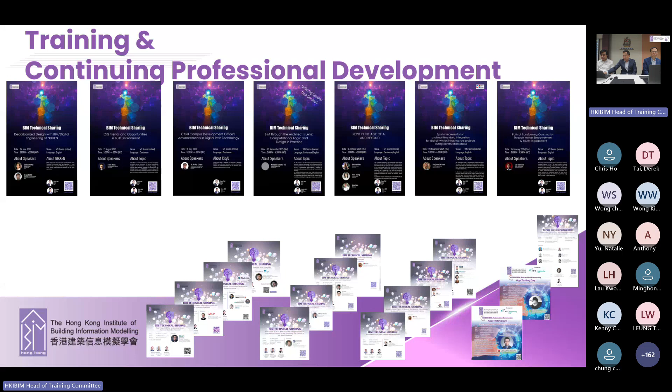Young membership division. This division recruits secondary school students. Some, like Kowloon Sam Yuk Secondary School, have already set up a BIM and GIS laboratory. So we are helping the young members, recruiting them and training the students in BIM and GIS. These are all the CPD events; for this term we already completed 7.

Past events: we completed the BIM Automation Arena 2025 in the first quarter of last year. We also arranged 3 site visits to the Centre of Future Construction of CIC, Trunk Road T2, and 2 other CEDD projects. HKIBIM and KIBIM: we have signed an MOU with the Korean Institute of BIM. Hopefully we'll be establishing other activities with these overseas BIM institutes.

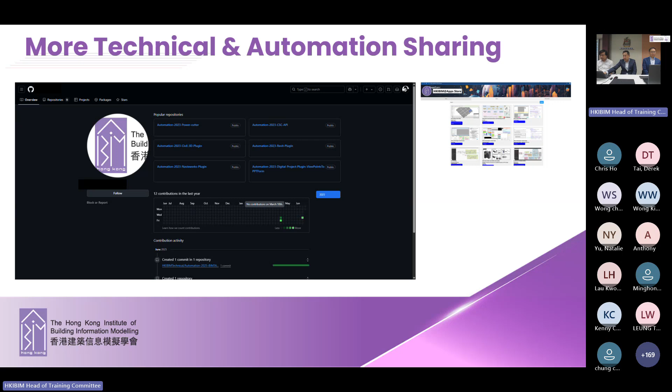We'll be rolling out a GitHub to share some of these automations. Hopefully it will be out sometime within this year.

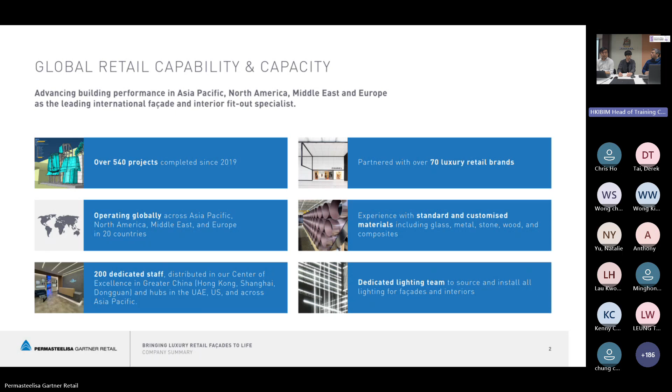This is the context of what we do and how we use 3D in our design and build life cycle. We're going to walk through normally which kind of project we work on and how we integrate the progress in our projects.

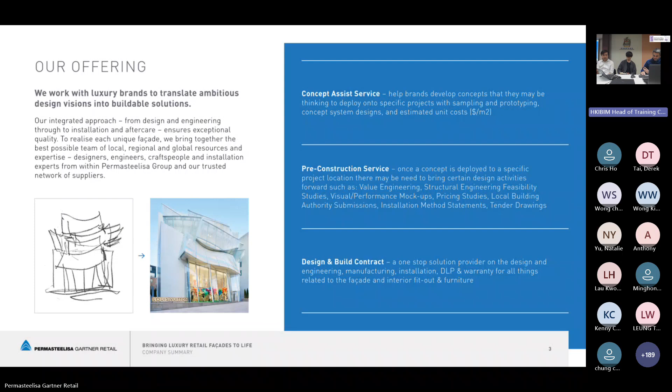Normally when we start a project with one of our clients, we start from a concept or pre-construction services. Before the tender is awarded and before the construction phase starts, we already start engaging them, giving support on material limitation and other constructability issues. So in the life cycle of a project, we can start before even the tender and construction phase starts. This is where a lot of the basic concepts in 3D are already being implemented, to get maximum productivity from our 3D.

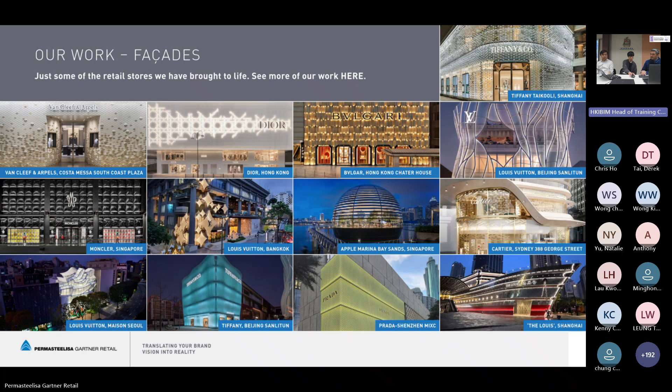We are all around the world, but today we're going to show you one particular project that we finished in China. Because our clients are luxury brands and normally like their privacy respected, I'll simply show you a couple of images so you have an idea of the project.

This is a project in China, in Beijing. It's a 5-story building, a curtain wall unitized facade that on top of it has a secondary decorative skin. This secondary decorative skin is the main part of the project. Although we took care of both parts of the building, the whole envelope of the facade, mostly we'll talk now about the 3D component we had to go through, from concept creation to completion.

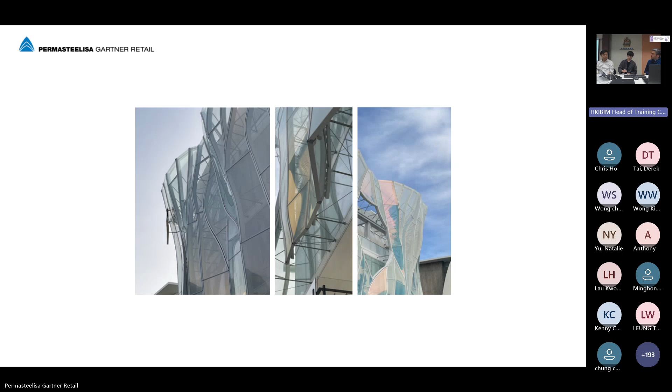I'll pass the rest of the presentation to Steven to walk you through the work done. Yes, hello everyone, this is Steven.

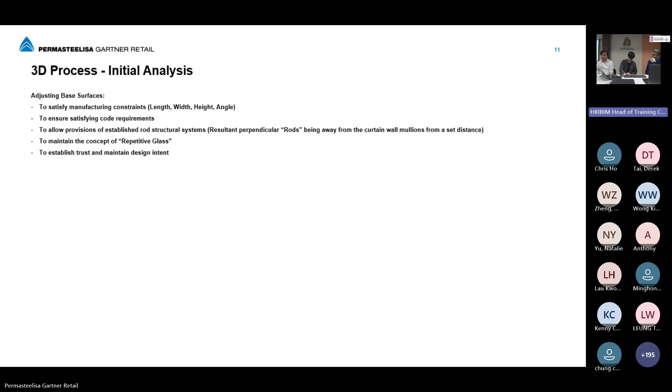I'd like to talk about how we basically walk through the whole 3D process. I think the initial starting point is to receive the architect's model, and then based on real world constraints, site conditions, code requirements, some structural thinking at the initial point, and most importantly, to respect the architect's design intent, to do our rationalization.

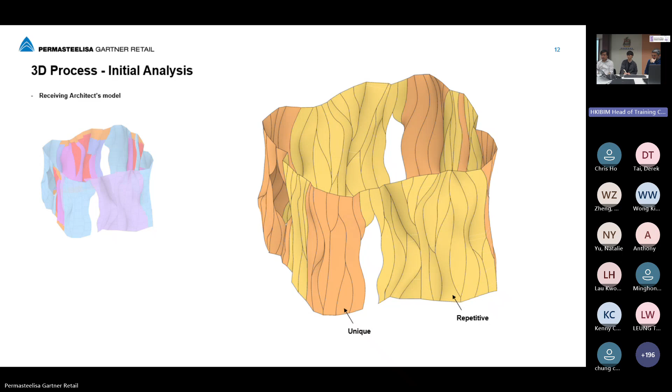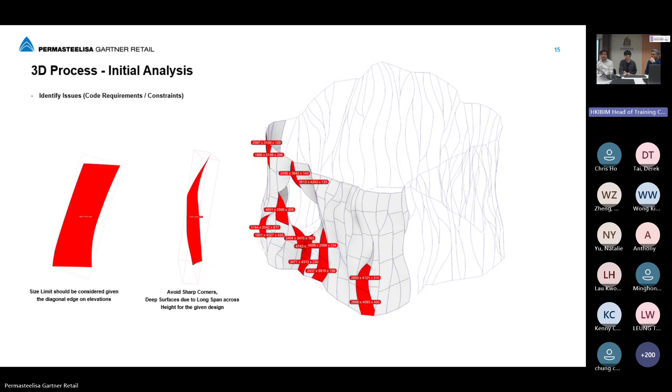Once we get the model, we do some initial analysis - maybe they are out of site boundaries, or sometimes code requires a certain maintenance zone. Initial communication with factories - glass sizes have certain constraints, and sharp corners need to be avoided. So we do this initial analysis and go through where the glasses are oversized.

I think the very important part is to understand the design from our point of view. This is the first step. We need to establish our own way of modeling the design, and at the same time allow adaptation of various requirements that come along the way.

For example, we have this kind of inner skin, so we have constraints when we want to set out our outer facade, because we want most of the structural members supporting the facade to be perpendicular to the facade. So the initial idea is to understand the design, find a way to replicate how to model it, but at the same time take care of the future constraints that will be imposed on the design.

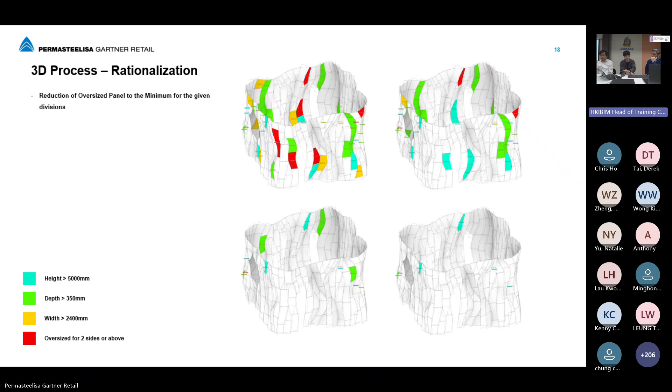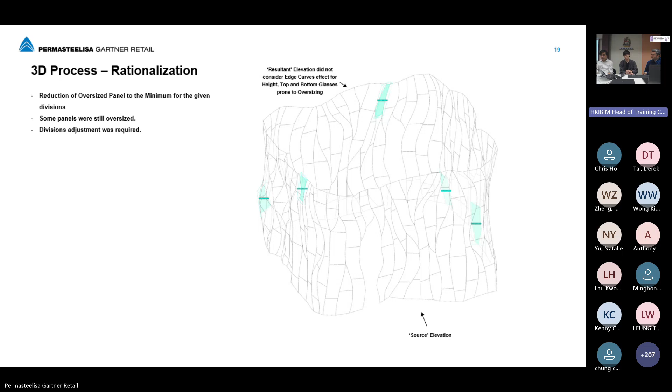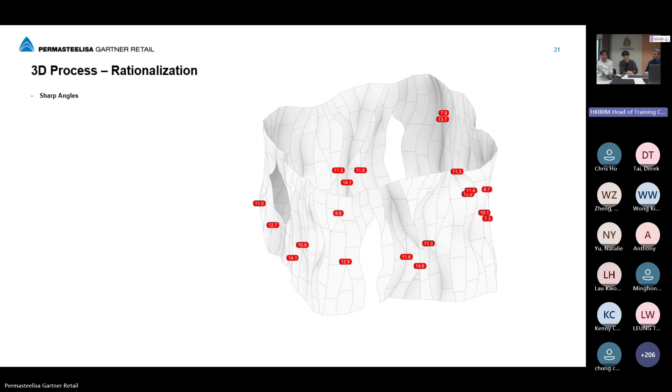With that in mind, we can establish our own way of creating the design, primarily in Rhino Grasshopper. We remodel the design and take a reiterative approach to gradually optimize it so we have minimum oversized glass. When it cannot be optimized anymore, we communicate with the architect whether they can adjust slightly the division of glass so it stays within the boundaries. We also communicate the sharp angle requirements so we can make slight adjustments to the geometry, keeping it minimal while still satisfying the requirement.

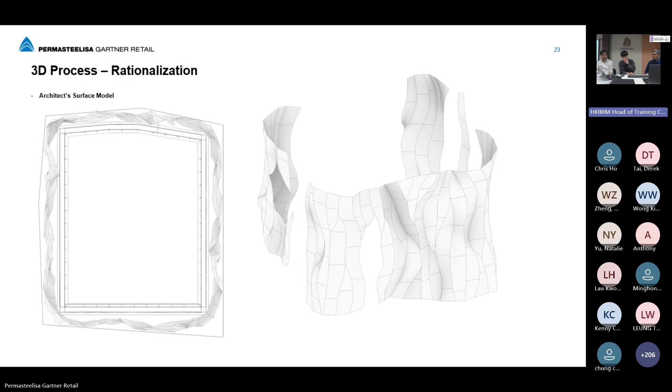This is an initial architect's surface model, and this is the PISA Gartner Retail surface model, before and after.

This is the first stage of our modeling, which goes to the LOD 100, but bearing in mind future fabrication needs. This also respects the repetitive glass idea that the architect would like to have, to save costs. Here we have 315 pieces of glass, 216 of which are unique, and the repetitive glass idea can be kept in the very first generation of the LOD 100 model.

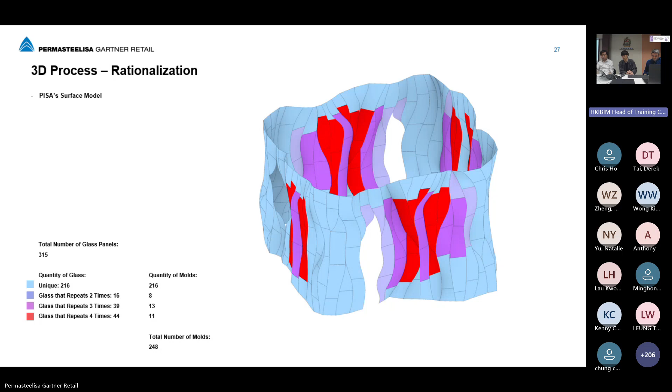Next we want to talk about the wireframe development, which is a core process of every complex project we do here in Gartner Retail. No exception for this project, because it allows us to create an accurate engineering model and, based on this true geometry information, to develop further fabrication models.

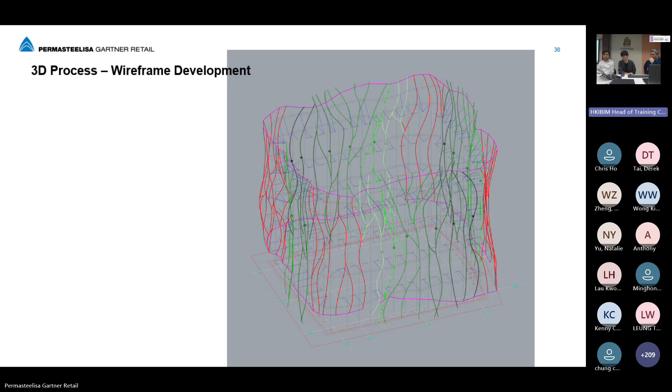So we go through the wireframe again. First we have the true curves in red, the unique curves, and all the repetitive glass representative curves. That's the generation input, which gets rotated 90 degrees, 180 degrees, to ensure repetition across 4 elevations. These curves are not arbitrary—the adjustment also takes care of structural requirements like clearance, and maximizes the perpendicular element to the inner facade.

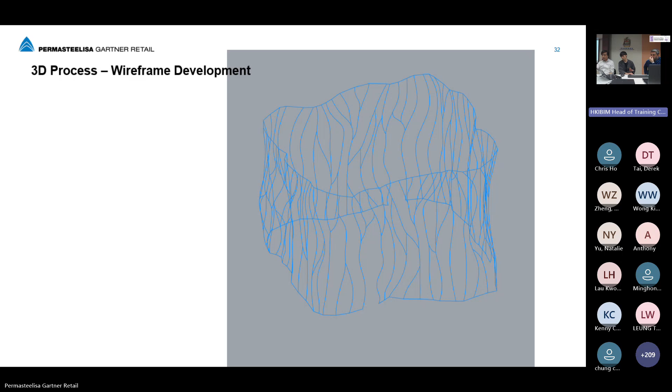Then we get the initial wireframe. From this wireframe we start to get the base geometry of the glass—you can see the closed boundary generates the glass. We take the architect's division of glass, rotate it just like before, and then we get the surfaces.

One key thing is that during the design process, we think ahead about how this can be more economical and more realistic. The pure generation of geometry may not be ideal because sometimes it gets really warpy. So we try to maximize the design intent while straightening all the edges, so that in the final fabrication models all the transoms end up straight.

Let me recap a little—at the very beginning, the client provided a design surface, and that was our starting point. After certain iterations, thinking back to the early stages of the project, we made sure the limitations of the material could comply with the initial intent. The first initial iterations show yes, we can achieve what you want, and with small variations, we can achieve that.

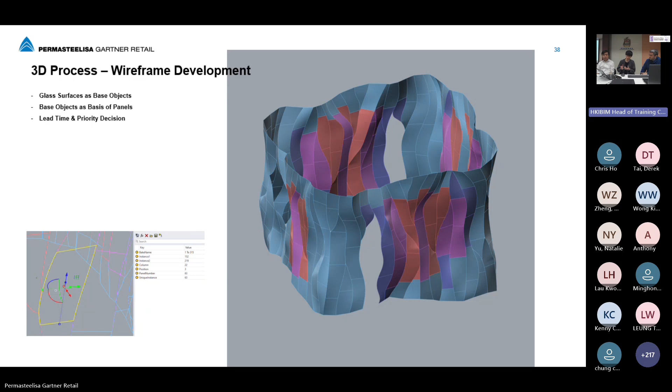And then in Rhino we input some initial data so that we can keep going, where the glass is a parent and all the children will go inside like the brackets that we'll talk about later. It's a very productive process, we think.

Just like what Jose is saying, the extremities of the geometry determine how the 2D looks, and what kind of sealant joint and gaps result. At the end it becomes very informative for how the 2D is drawn for the final submissions.

Okay, so I think we want to talk about some things that cannot be done without 3D, or cannot be done without this kind of parametric modeling.

One of the trickiest parts in this design is locating the brackets in the CHS. Basically, on the left side you can see this is a typical panel, glass, and they have different brackets. But each panel shares one CHS, so they are always competing for the space.

Computational design helps a lot here because firstly we locate all the corner brackets, and then use a methodology like musical chairs. The first panel gets the intermediate bracket space, then the next one grabs the remaining available space, and then the next one, and the next one. They loop through like a musical chair, so at the end all the brackets can be looped through the process without clashing with each other.

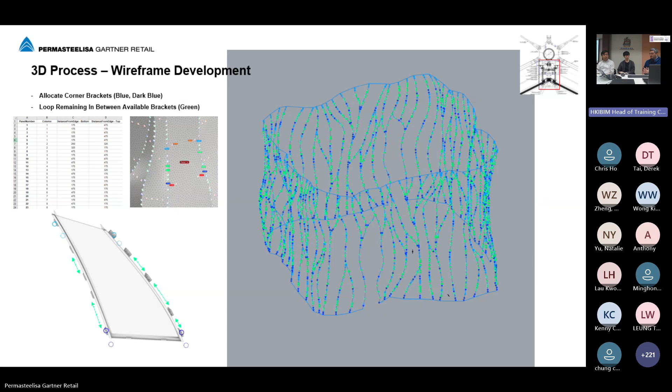Yes, we are looking for efficiency here. And it can repeat, basically—yeah, it can repeat.

So once we talk about brackets in terms of points, we basically locate them in space. The left one—later we'll talk about the engineering of the brackets—but each bracket has some attributes linked to the panel itself, so it's a child of the parent panel.

Then this information translates directly to the engineering model, which we'll talk about directly. On the right-hand side, after the engineering model comes back, we can directly transfer the calculated models and how the engineers assign the bracket types, directly mapped onto the brackets.

And eventually it becomes the real bracket happening in the fabrication model. To visualize, when we say the engineering model and the input from the engineer, any panel is going to have a deadload bracket, a horizontal slot hole, a vertical slot hole, and an oversized slot hole. This kind of information transfer happens even within our own team, between our own engineers and our own system designers.

The tool to do this is an Excel file, which is an extraction from the 3D. So the engineer only says, these are the conditions that you need to meet, and here is the naming of every bracket for every condition. And automatically this information is transferred to the 3D. Yes, so all the things have the naming. For example, the panel number, then the type of the bracket and whether it's left or right. So everything gets connected to the base file.

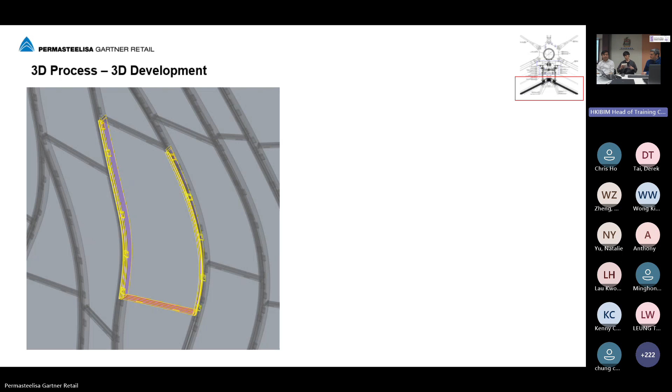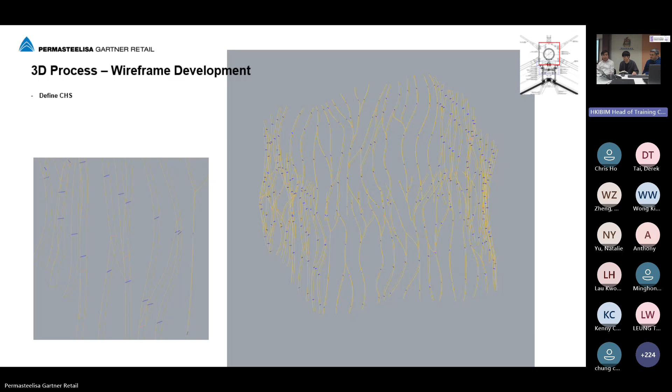So up till here, we are already talking about 100-something files that interlink together, but they can be quickly updated one by one once their previous steps need to be changed. Yes. So these are the kind of panels that we talk about. Okay, so in this sequence we are going from glass, to the frames that support it, and then to the CHS that the bracket is holding on. So, going inwards. We define the CHS straight through the geometry we talked about, using a very rigorous offset relationship, determine all the intersections and create this base surface, and then we get the offset glass surface.

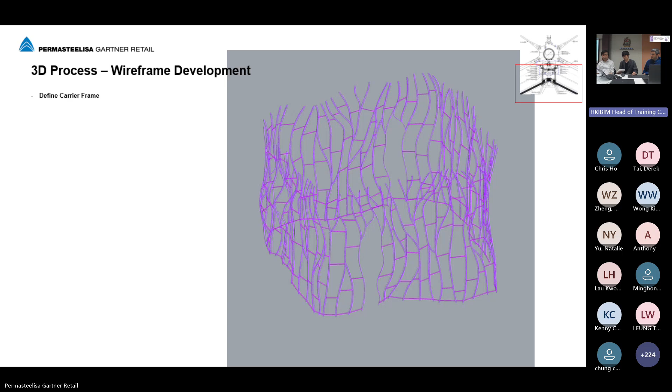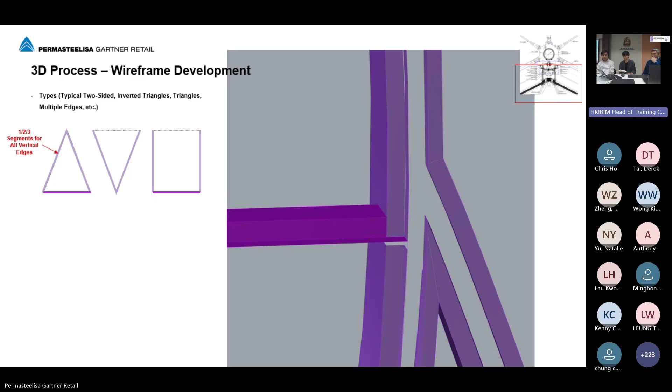So we need to have a rigorous filtering system to understand every kind of geometry and model them separately, and it can be automated in a certain way. And this gets translated directly to the engineering model that we talk about. And here, you can see we are even defining the setting blocks for the carrier frame that the glass sits on. These setting blocks are also related to whether a panel has a transom or not, whether the mullion is segmented or not. And everything gets automated in this way. So eventually we get into the panel engineering model.

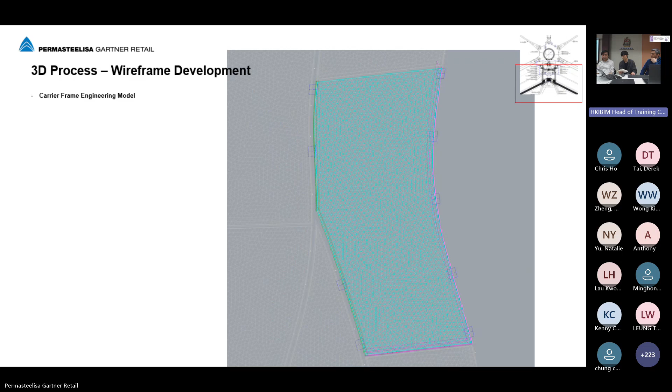This engineering model is basically a very accurate model that represents the true geometry relationship with meshes, lines and points. This is one panel, and these are the adjacent panels. You can see this is a line and point model, but it actually represents the geometry information. For example, there's a bracket in blue, a very thin line. The purple, magenta is a mullion. The glass's various layers are meshes, triangles. Even the setting blocks are represented in lines perfectly connected to the meshes, so that everything gets translated to the engineers for them to calculate.

Of course, this demands very expert engineering. It's an engineering feat, to be honest. The engineer actually has the capability to master parametric design and understand this massive amount of data to make it possible.

So eventually, the glass and the panel calculation was done in Strand7, but we can work together in a Rhino environment as well to have live feedback, and we can go through the kind of reiterative process that we talked about.

Then we start to talk about the CHS, 3 points in CHS. So CHS is a curved structure that our bracket rests on. I think the key thing we need to do is to make it single curved, with a radius for easy manufacturing, which is very common. But there are three things in this project that are special. The first thing is the curvature. This is a very free-form curvature.

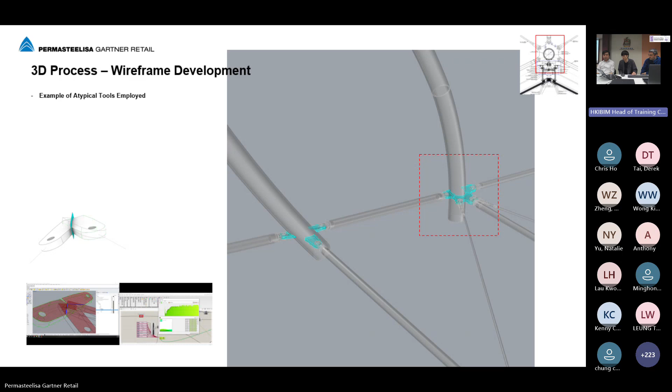So eventually it becomes geometries, having these ears that catch the rods, which the next slide will be talking about. This slide is basically talking about how along the way we have some very atypical situations that are common in many projects. So we need to develop custom tools. In this case, we are finding the best intersection of very random-looking ears, because we need to raise the facade at the bottom level, which cannot be horizontal. Okay.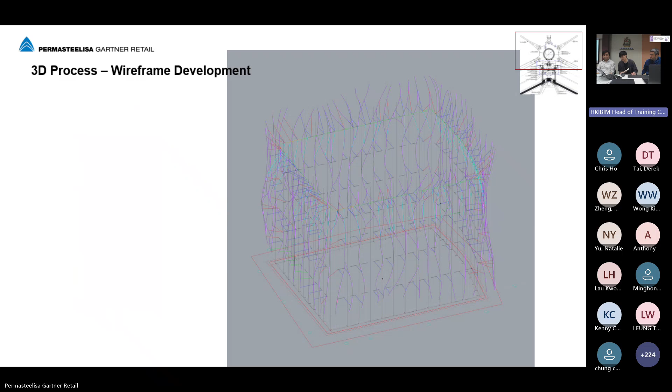Here, you can see the curvature that we are trying to control is as close to 90 degrees as possible to ensure the efficiency of the rods. As we said, in this rod arrangement, we consider the constraints of the inner curtain wall, embed locations, different kinds of constraints, and more structure. This is the dead load, the dead load cables, and then we have bracings and stuff. So within this network structure, how are we going to tie the network of rods back to the main structure at the spandrel that we are seeing here?

I think this comes to really the core of a real communication between system designers, facade designers, and 3D, because at that time we don't exactly know the result, but at the same time the system designers have to foresee what is going to happen. So basically we have different kinds of rods that meet each other. At the end, the system designer came up with a facade solution with 4 main types of adaptive component brackets. You can see on the top left corner these 4 main types.

The first one is the adaptive component that takes care of the horizontal plane of the rods. So the rods that only come back to the main building horizontally use the first type. The second type is horizontal plus the upward rods. Third type, horizontal plane plus the downward. Fourth is everything. So here you can see the system designer has a really smart design that can capture all the directions of rods that go back to the building.

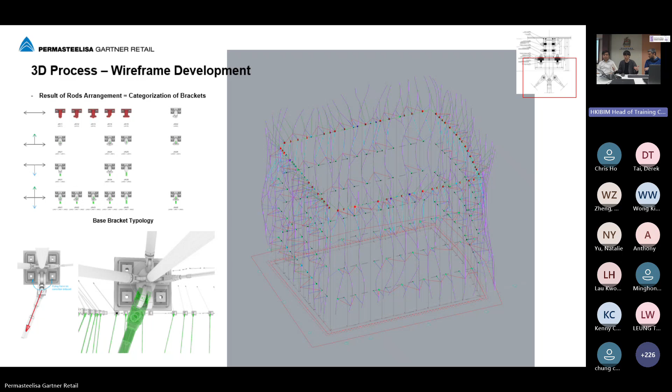And how many rods, how many types of rods, and where they go is basically automatically determined by the 3D model, because the 3D model is already there, and you can analyze how they are coming to that point. So through that, you automatically get how many types you are going to have during the design. So the 3D model counts for you. It does the work for you.

So I think this is basically, you can see on the screenshot, the center points of all the rods to that adaptive bracket we talked about. Also, you can see the little tiny legend on the top right corner.

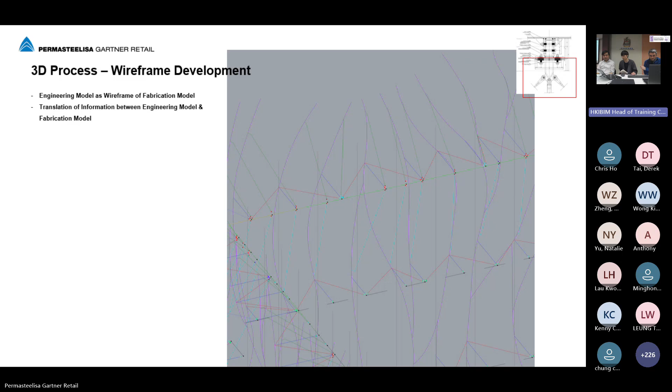I think in this slide, before and after, just to show, again, the wireframe, the center line is exactly representing the fabrication model that we are going to see. And this becomes really effective because in this project we take the fabrication model to the client for final approval. And because it becomes really fast and automatic, I think it was quite smooth during the process.

Let's take a step back from the nitty-gritty details that Steven is explaining. All of this is really heavily visually impactful for what the client wants to see. The client wants to see a piece of glass that looks like a veil floating in there. Now we start doing engineering and showing them rods and tension cables and things like this. And they need to visualize and give us input. We have a VIP room here. This is too crowded, modify it. So we need to change, go to the engineer and come back.

Again, this is tied up with the name of the presentation, design and build life cycle through 3D. Because design is a process by which you keep going deeper on the spiral. You do one iteration: client, engineer, manufacturer, our system designer. You present to the client, who has comments. You do another loop, and you keep tightening, till you run out of time, you run out of money, and everybody has done the best that they can do.

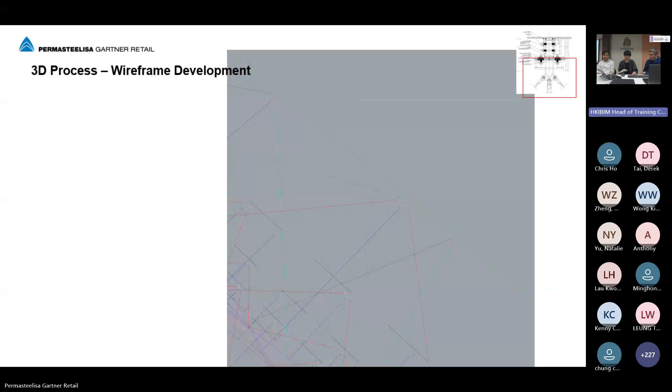Because we are doing a presentation to you which looks linear. We start with the glass, carrier frame, CHS, tension rod. But the reality is that we give a pass to everything. We get a comment and then we come back. Again, it was an iterative process. I would say without this kind of repetitive process or this kind of system, it would take a century to finish, because there is really a lot of automation happening here.

Same slide, center point, fabrication model, same relationship. Okay, we need to go fast. Final two parts for the 3D modeling. I'll talk a little bit about the fabrication.

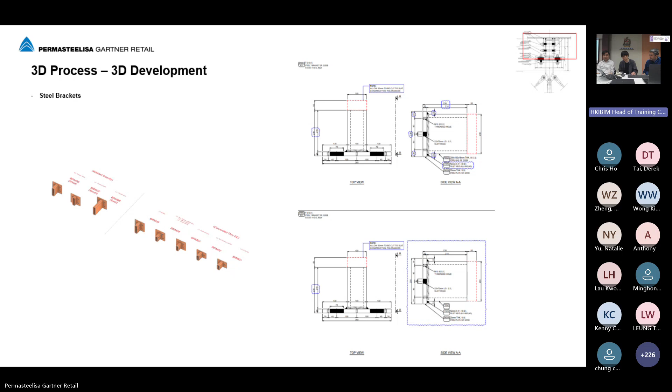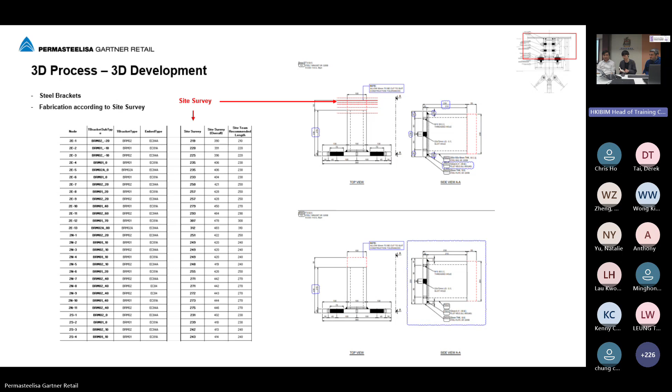So initially, behind this adaptive bracket, we have this steel bracket tied to the main steel structure. Unfortunately, the site survey came back, and it is not the ideal line we all expected. But we can quickly talk to the site team, and we also communicate through data sheets. They quickly came back to us with each point from the site survey, and then we basically recreated the whole steel frame quickly, directly fabricated and sent it to site, and we didn't have any cutting on site for installing this steel fabrication. Otherwise, we would have a lot of remedials on site, costing time and money.

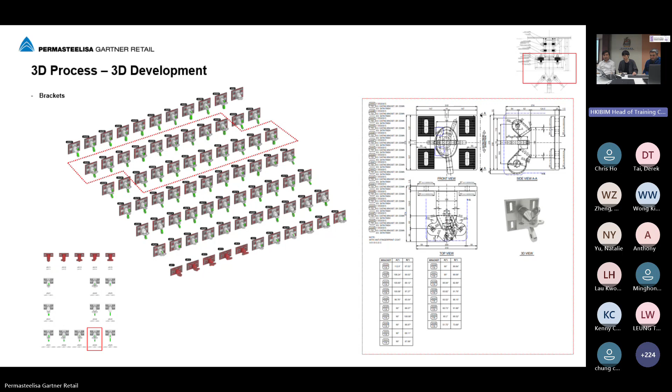Adaptive components in front, same. Basically, depending on how the rods are hitting the points, we automatically generate all types of brackets through computational design. All the rods have their own attributes and naming. This is the diagram showing the actual installation diagram for the site installer. But at the same time, we embed all the information in our models.

Which, by the way, is a tool, the same way that before we were talking about with the engineer and the system designer, how the engineer is explaining to us which are the dead load brackets, which have the slot holes like this, which is the vertical slot. So this is a communication tool to our site teams and our manufacturer. They are getting a really digestible quantity of information.

There were hundreds of rods. There were hundreds of brackets with small variations, but having a really clear color coding system, numbering system, and documents that are really easy to read, the communication with the team becomes easy. And in the end, we are looking for efficiency. Efficiency on site, efficiency in the manufacturing.

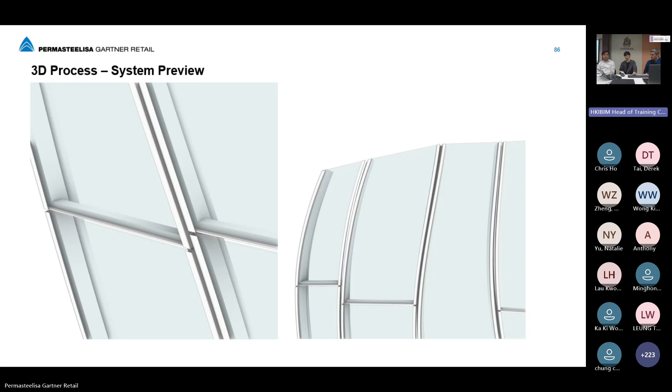Correct, because what we were working on 99% of our time was that wireframe 3D that doesn't tell you anything if you are an architect. It doesn't give you a visualization, which is the final product. But we were able to bake through Rhino and extract this kind of, not an LOD 350 yet, not 400 for manufacturing, but they are in this 200, 250 that is good enough for them to give an approval. Modulation, size of the cappings, size of the glass, proportion. The most important visual elements.

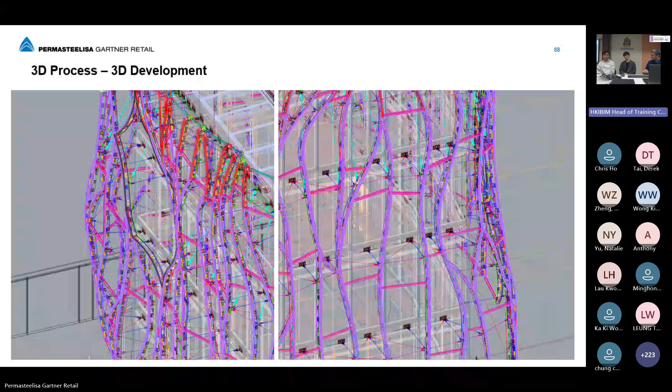Yes. So eventually we come through and we have a full LOD 400 model that is used for everything: fabrication, site installation, client's final approval for everything. Okay, final part for 3D modeling. As we said, all the models are linked with data. We have a lot of attributes in our objects in the 3D space.

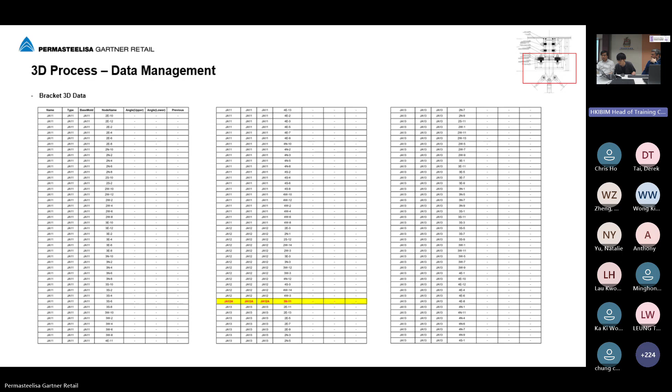For the first steel bracket, we link with the site survey data, for example, and what is the type of the bracket, what it is connected to, where it is. The front adaptive component shows all the node information, where it is, the angles, the position, base type, and the base model it is.

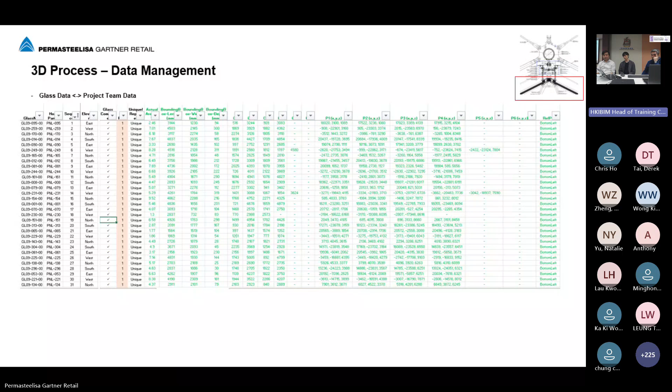And finally, not only within the design team, we are talking through data with project teams, QA, QC. We quickly export all the data for them to measure panels in the factory to make sure things are in tolerance. The project team can make use of this table to input their preferred construction sequence. Coordinators can keep track of which glass has been done, has been shipped, through one single table that we can keep referring to.

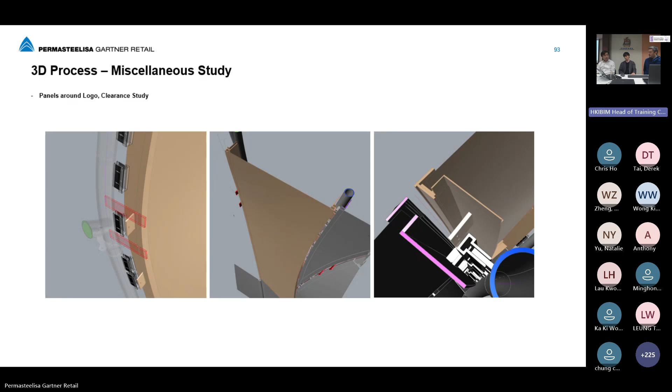Some GIFs to show what looks like an improbable installation, because we have some signages in the CHS, it is already a very tight space. And we have some signages that go through the CHS. We want to know whether the panel can be installed or not, so we have a lot of these animations. This becomes, again, a tool of communication with our site installers where we show them the installation sequence. So this is a part of the installation method.

Yeah, one more GIF. So basically, luxury brands want to expose their design at the very last minute to have the wow effect. At that time, we need to install the canvas on top of our outer skin facade, which is already very optimized, so we want to understand the load applied to the canvas, whether it's acceptable or not, and what kind of support we can apply to the canvas.

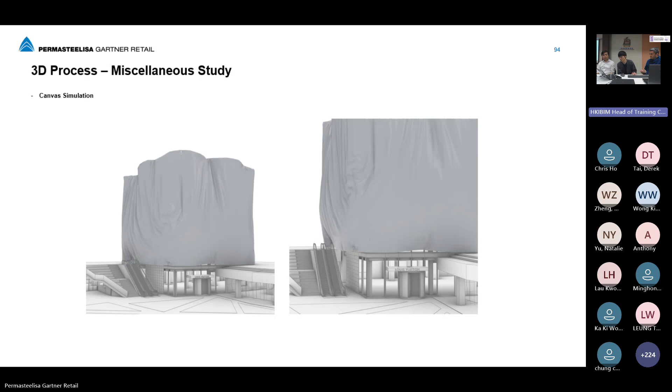And at the same time, the client wants to know, on this irregular facade, how the canvas is going to apply. So the animation is also actually an engineering model to let everyone know how it looks as a fabric on the massing.

Okay, so not the conclusion, but this is just the modeling part. We have a few more slides, but a few important things. Object-based, like a determination of things that we model based on objects, so that everything can go afterwards. So in this case, it's a glass as an object.

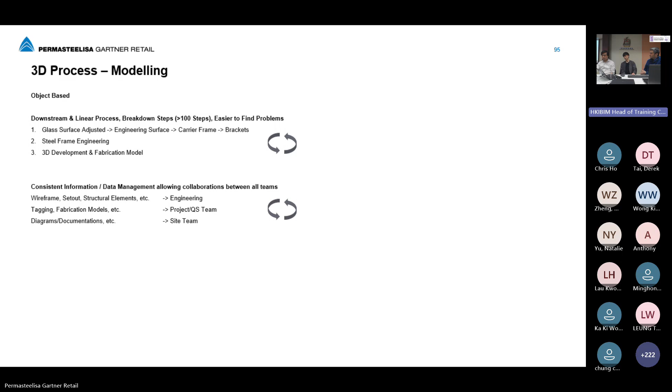Second thing is like a downstream linear process, because, as Jose said, everything is so complex, but at the same time, there are many changes. We need to establish this kind of process that allows us to be adaptive in the process. And also, as we all know, doing this kind of Grasshopper or scripting, it's easier to debug. If it is too long, it's very hard to debug, and it costs so much time. At the end, this kind of consistent information data exchange between the teams is very helpful and productive for everyone. So we have some more slides about the real construction.

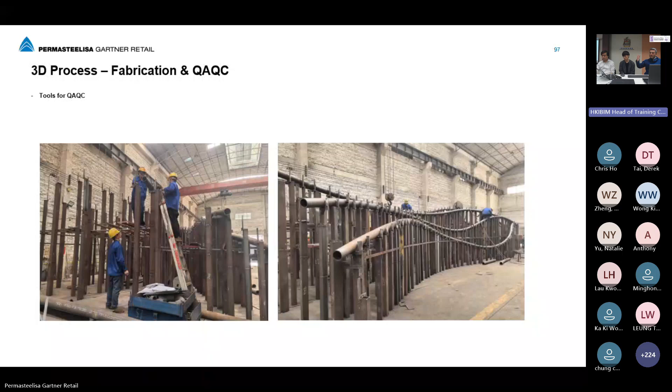Every one of these brackets was cast. So it takes a long time to manufacture them and make sure that they are going to deliver on time within the correct tolerances. There was no time for too much back and forth between factory and site. This is an idea of what these CHS that we were talking about look like. This is a 12-meter long CHS that has been manufactured all in one piece, and then later it will be cut to be sent on site. That was the color coding that Steven was showing previously. So the manufacturer already knows where he's going to cut a certain piece, so it fits within the truck and it can be lifted and installed on site.

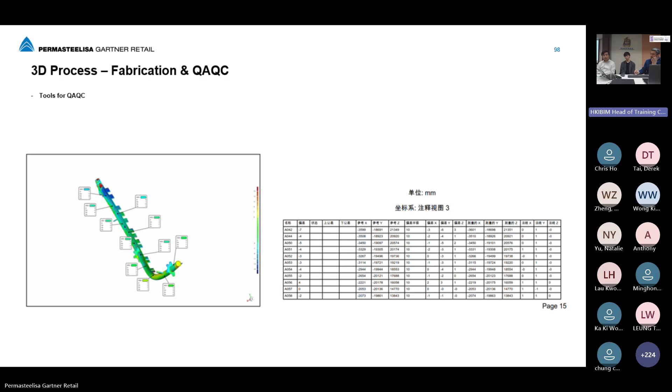All of the CHS, because you have a 3D model, can be 3D scanned, and you can have a color coding of where your tolerances are. So you establish a ±5 millimeter tolerance, and you find where your hotspots are where the tolerances are out, and then the manufacturer can focus and try to rectify those parts. That was for the CHS.

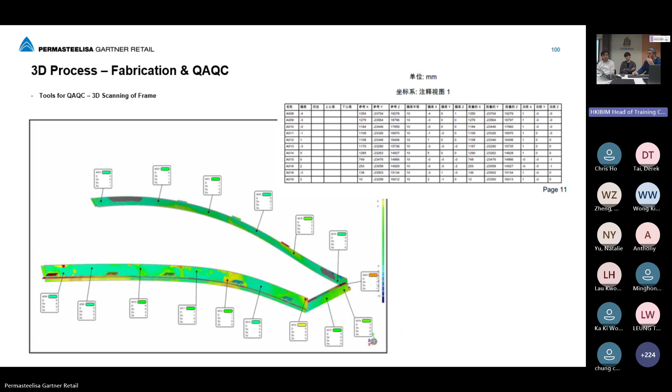So the carrier frame: the glass comes with a three-sided steel that holds the glass. That was this carrier frame. Every single piece was a completely unique shape. It's not cylindrical, it's not conical, it was like an organic shape. So it required jigs and required this kind of 3D scans to make sure that they are within tolerances. Again, if you see how complex this geometry is, having certain control points and plus minus left right won't be enough information. This kind of heat map will show you hundreds of thousands of points within one frame, and to know which are the errors.

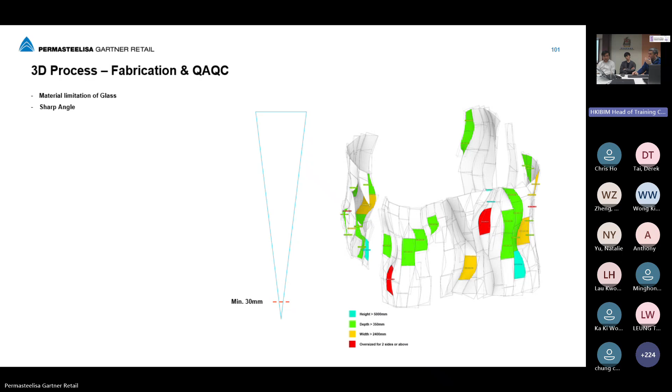The same for the glass. We were choosing which are the biggest glasses that are going to be manufactured, which can be a trouble. They will be given to the manufacturer, and they use that information for fabrication drawings, and then later to measure every single glass. When you have a square glass, it's really easy. You measure the height, you measure the width, you measure the diagonal, easy peasy. When you have a 3D shaped triangular glass, how do you measure it? Because you cannot measure a diagonal. The glass is curved itself.

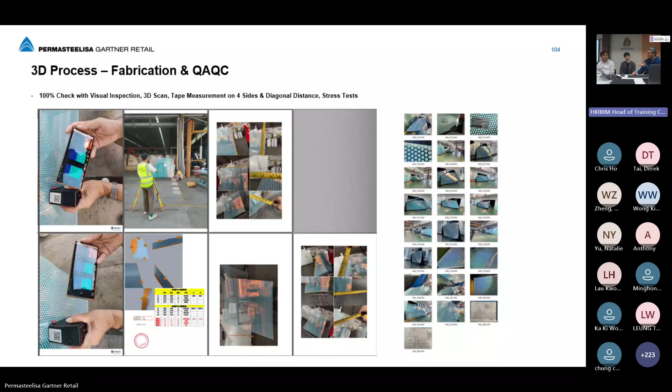So they were using a point, a 0, 0, 0 point in space, and they were measuring from that point to every piece of glass. That only can happen if you have a 3D model of every single piece of glass, and the manufacturer is willing to work with you and use your raw data for them to measure.

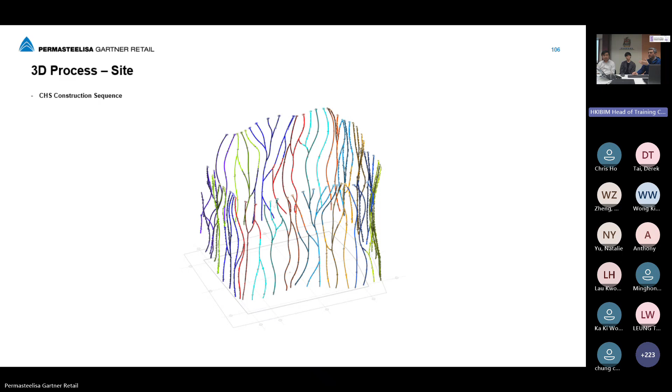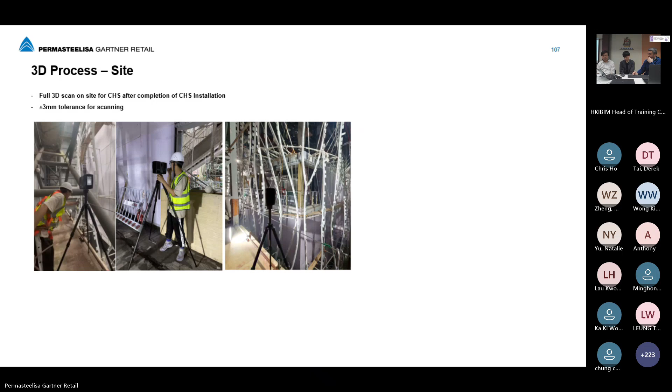As well, not only for manufacturing approval, this is a communication tool with your installer. This is the color coding that I was showing before. What you were seeing laid out on the ground is this color code and how it's being delivered on site, packaged, and installed in the correct sequence. On site it will be surveyed accordingly, and every single control point on the survey is going to be measured and fed back to know where you are within the tolerances.

And the installation sequence of the glass: as we were showing before, it's a CHS structure with a pull and push rod system. It needs to be installed and loaded in a certain sequence. It cannot be all on one side and nothing on the other. So this is a really easy communication tool to others. As well, for approval of the architect, when we have a mock-up on site and what we model, they can see that what they saw on the mock-up and what they see on site is exactly the same.

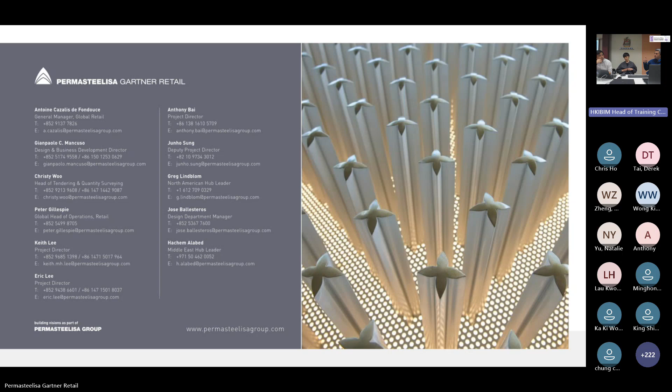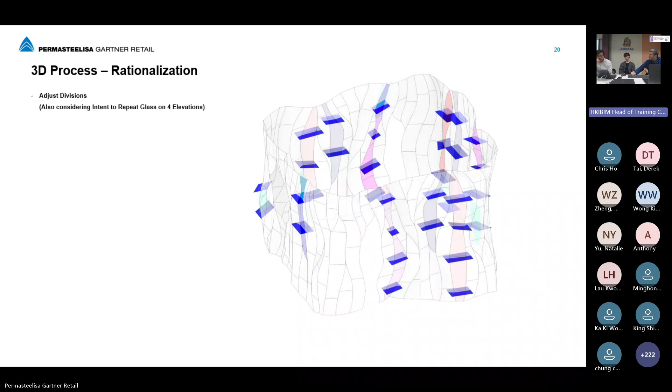Correct, it was 5.5 by 2.4 meters — yes, that's a pretty big one. That's why when the project is complex, we require one of the services we always try to bring to our clients. Most of our clients doing bigger projects understand this because we've collaborated for a while and they're used to this kind of process.

But to be able to achieve it, sometimes we don't even know we started with a dichroic effect — we discover all of this along the project, but we require time to figure it out, which is the limitation. We need to have mock-ups, the client needs to be able to see it against the light. That's what we're looking for, and all of that requires time.

So we always need to do a pre-construction service where we go and try to nail down all these initial constraints of the project before entering the construction phase, where everything needs to be efficient and quick — no more design changes, because that will delay the project and go over budget. We try to spend all the time and brain power to solve everything during design development. This is one of the most sizable projects in pre-construction service to design build.

So yeah, cool — guests and members. Sure, so what do you think of the quality of the manufacturer of these glasses, because it's so complicated? The quality right now in China is really high.

5-10 years ago, we still had the limitations that any complex geometry or complex fritting had to be done in Europe and shipped, which requires a longer lead time and higher cost. Now China is able to manufacture this kind of glass with really good tolerances, within a decent amount of time. You don't have to deal with shipping, which can be affected by war or oil prices. So when working on projects in Asia, you can perfectly get all the raw material from China. They have the quality and the expertise.

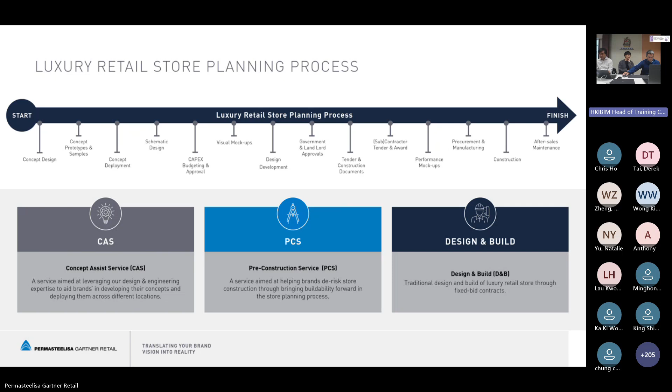I have one more question. I understand that your design is very complicated. So as an engineer, when considering structural integrity, is it very difficult to convince the structural engineers how they calculate it, and prove your facade is structurally sound and safe? I think your facade is very complicated - as an engineer, I think it's very difficult to prove its structural soundness and safety.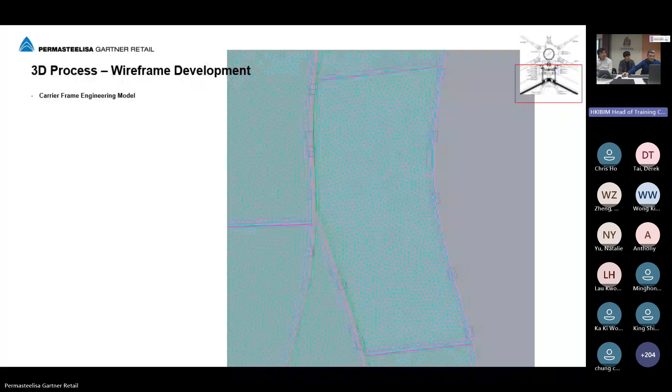There are two steps to the engineering process. One is the initial pre-check - going through the design cycles, asking can you check something for me. They will tell you, okay, I require one month. And it's like, you don't have one month, you have two days to tell me if this size is correct or not, because I need to plug this into a system designer, then the 3D designer, then get to the architect. You cannot go linear. I cannot give you all the information so you take two months to calculate and create a report - you need to be agile.

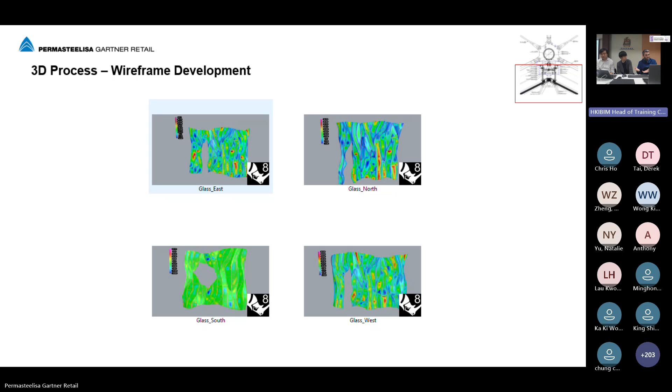That is why the 3D enters here. Once most of the engineering work - not the calculating, but coordinated with us - the 3D has the information required to plug into, in our case, Strand7 and their own scripts, so they can run their own calculations. They spent the initial calculation and communication time with the design to make sure the 3D could do that work in the future, where you could press a button and get a result more or less quickly, which was not the case because it's way more complex. An example is this page the engineer used to show us - every single rod, a finite element model. So when the client says I want to make the window a little bit bigger...

Okay, so now this panel is getting extra load because the tension rod is longer. We do an update in the model and automatically you have a utilization shown here. This bar here, shown by our engineers, was automatically updated and tells us the utilization. To redo that kind of geometry, we only need to update the 3D, move that to the right, and run it.

It's not like pressing one button one day, it takes many months. But the end goal is that point, and the iteration, coming back to the client and saying 'can you move it to the right a little bit more,' running that iteration costs way less time. If you work linearly, that's all you get.

Once you award the project, you'd need to tell the client, sorry, you cannot change anything, there's no time for you to give any input. In this way, we can always fine-tune as we go along because they have easy ways to come back to us and say, yeah, you can move a little bit to the right.

Okay, 150 - if you move more than 150 to the right, the utilization goes from 60 to 95. More than 95, sorry, I'm not comfortable. That was the tool to communicate with us, when they were saying 'I'm not comfortable with more than this utilization for this particular element,' or 'yeah no problem, I need to go to the next rod size - instead of 50 millimeters, I need 80.'

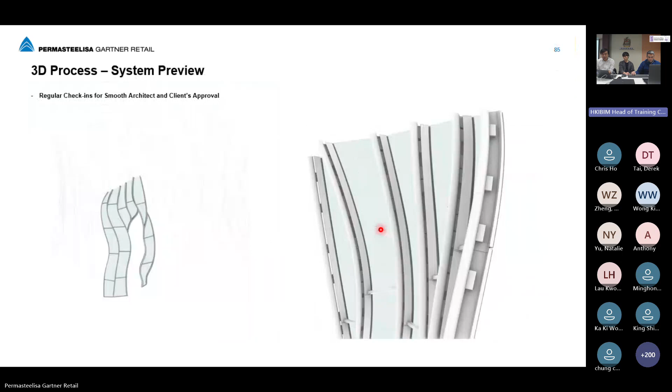Okay, we're running a bit over, but I think we have one more question online. From Retm: the glass panels in the model are very distinct from each other, so it's challenging to put them in the correct sequence on site given the curved and irregular surface - assembly work like putting many different pieces in a puzzle. How can the team ensure correct assembly of the different prefabricated glass panels on site by workers, because those workers don't really understand our design?

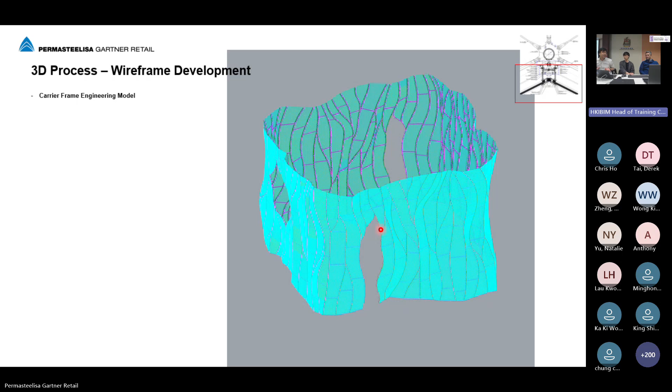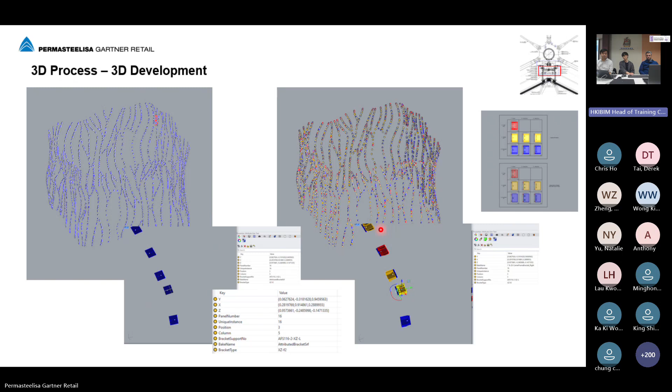I think the first answer is, again, we have a naming system for the glass, and this naming system carries through from the very initial stage. So we know this glass is number 1, this glass is number 2, etc. From here, we can easily generate diagrams, even if they don't read 3D models.

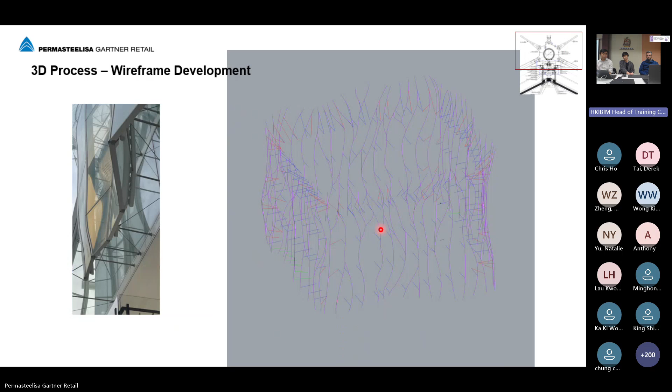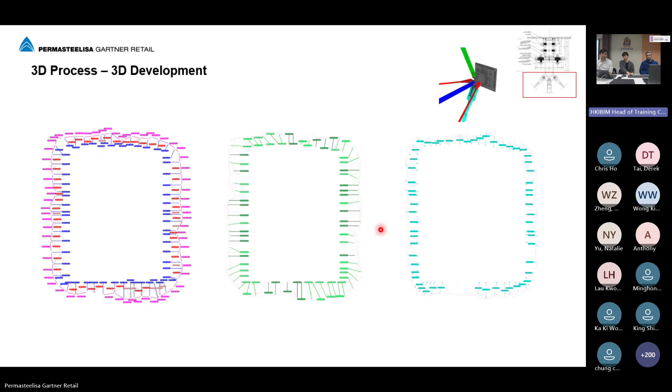We can create easy-to-understand diagrams for installers. For example, many installers don't open the Rhino model to pan around and know which one is a rod, but we go through here and can create quick diagrams for them to understand which panel goes where, on which elevation - which we didn't show in the slides, but we did create diagrams for the installer to understand.